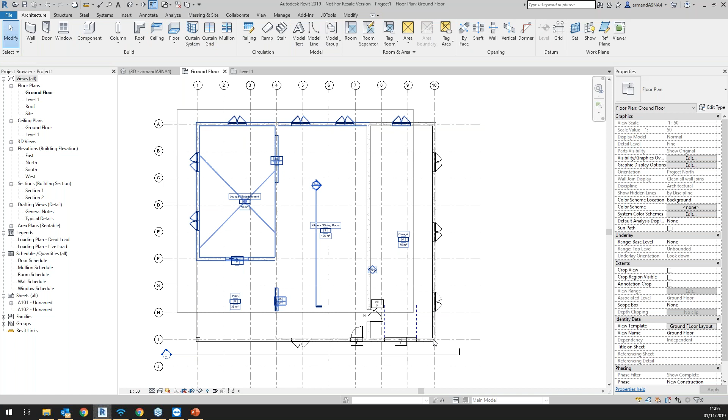I just want to go through and show some items that I feel are probably the best ones to have a look at. All right, so the first thing we're going to look at is our different selection options. We all know the very basic selection boxes that we can do. Those are the first ones. The other one is if we need to select items, we can just select them all and filter out whatever we need over here just by checking none. I know some of this is very basic, but you'll be surprised how many people aren't sure of all these different ways of selecting things.

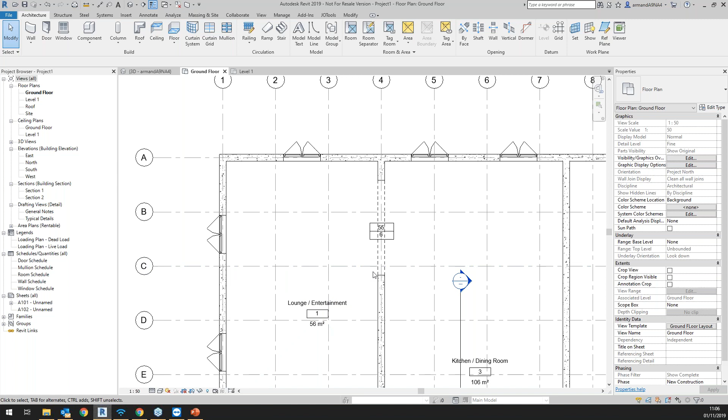Also, if we need to select something important and we are unable to recognize it, like over here, there's a room, and I can't pick it up, just use Tab to cycle through the selection options, and you'll be able to change what your selection is, even though your cursor is in the same place.

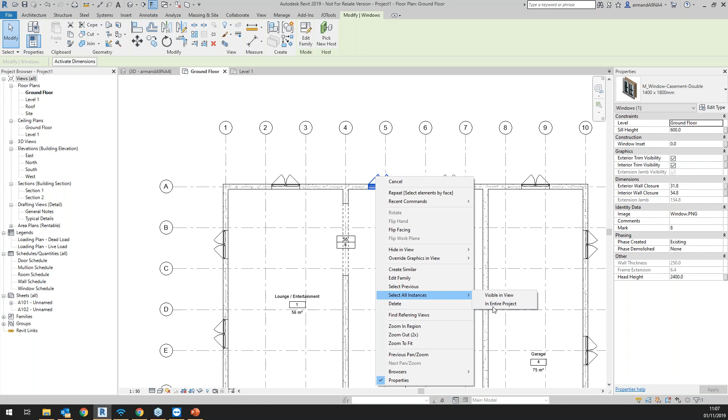All right, the next one is if you are able to find what you need to select. So for instance, I want to select this window. You can also right click and say select all instances, either in this view specifically or in the entire project. So just be very careful if you need to delete all of this type of window, for instance, on this level. We're on ground floor, so be cautious not to choose entire project, because if you do that and you press delete, it's going to delete all of them everywhere.

Okay, so that's just one aspect that I just wanted to have a look at quickly. And finding some common commands. So over here, I'm just going to show good ways of being able to identify or how to basically make Revit work for you.

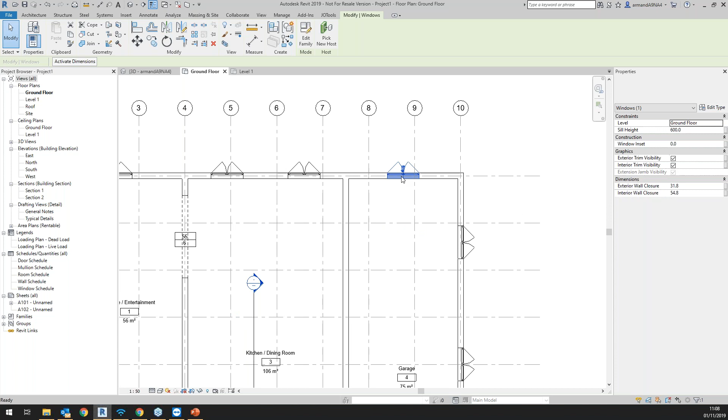So one of the most common things is guys are always asking, if it doesn't have these flip direction arrows in here, how do you basically rotate something easily, or on placements? If you just highlight or select your object and you press spacebar, it'll cycle through the different angles that it can be at. So if we have a look at a door over here, and I press spacebar, we'll see it'll cycle through all the different ways that that door can get placed. So that's just something also that we need to remember.

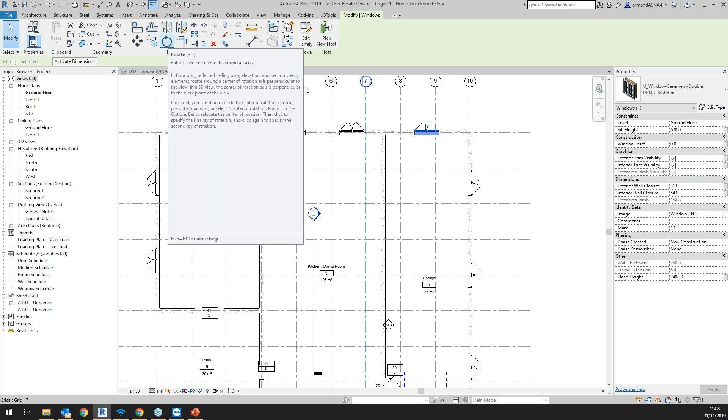It's a very quick way of doing it, as opposed to trying to actually select the item and then using the rotate command and then rotating it around. Also, if you rotate it like this, it doesn't necessarily rotate it around the center of the wall. So a lot of the times you rotate it like that and it doesn't want to work properly. So using the spacebar there is a really good way of just flipping the object around.

Okay. Another thing is, if we wanted to see the level above or the level below in our current view, we can make use of our underlays over here, and we can decide what level we want to underlay onto this view. So we're on ground floor, and if I wanted to underlay level 1, we'll see that our level 1 information will pop through over here. So that's the roof overhang that we've got there, and obviously the steel section roof outside. Okay, so that's just different things.

Remember, before presentation or anything, just to set it to none over there, very important. Also, be cautious if you are using the underlay option and you are tagging items. You have the possibility of tagging the wrong items. So just use this underlay basically just as a visual for that time being. I wouldn't work with it on 24/7.

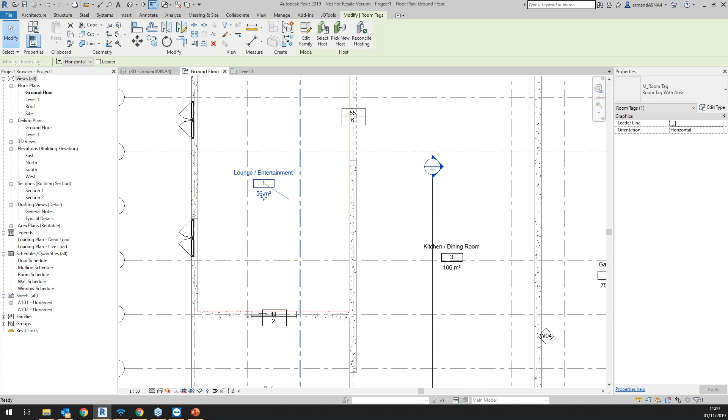Okay. Another thing that we want to have a look at is, for instance, room tags. I actually had something come up during this week specifically where guys were struggling with rooms. So I showed the guys how to create this very basic room schedule. So we can see all the rooms that we have over here, and everything's reading well. You can see all the room names are there, the room numbers are there, and all the areas are calculated.

Now, what was happening is, especially for the guys that aren't as confident on Revit or don't have as much experience or not 100% sure on what they're doing yet, and I'm just using rooms as an example, this happens with a lot more than just rooms. What will happen is guys will try and put a room in here. Sorry, I don't know what's doing the auto create now. Just go to a different view here, room.

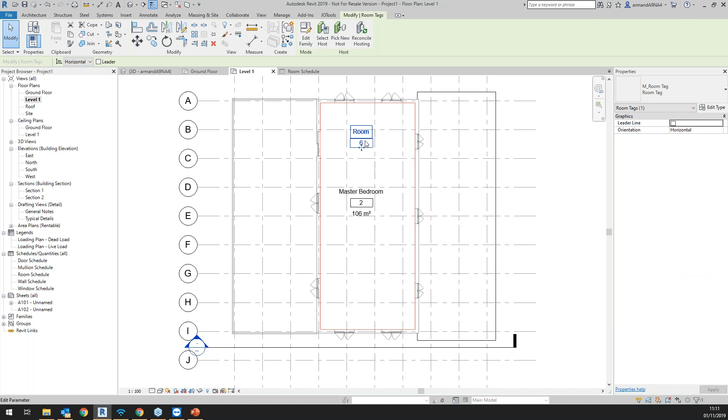So the guys will try and put an additional room in, but perhaps they've forgotten to add the tag, or they've got this automatic tag off, or they see it and they ignore it. So then they just say, okay, that's fine. And then they've got 2 room tags here, and now it looks fine to them. A quick way to figure out if you've got the correct rooms without trying to go and select them all is to have a look in your room schedule. You'll see we've created an additional room over here, and you can see the area says redundant room. Whenever that says redundant room, then you know something's gone wrong and you've more than likely just got double rooms in those areas.

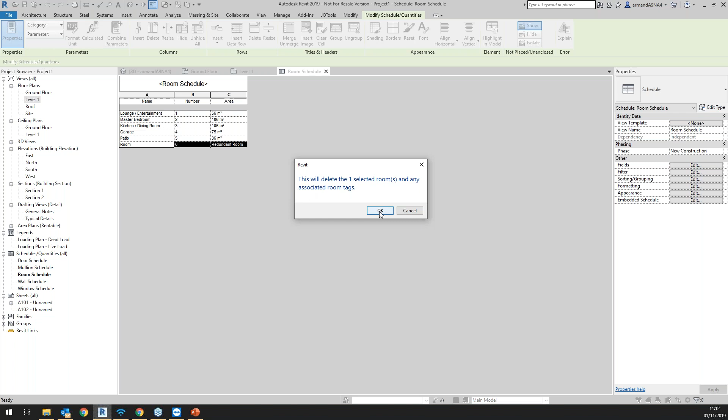And I know that especially on the bigger projects, in the architectural field specifically, you'll have hundreds of rooms in the bigger buildings, and to go back and try and find exactly where that is is another nightmare all by itself. So what you can do is just select that row, right click and delete the row, and it will delete this one selected room and any associated room tags. So then we know we've now gotten rid of any additional information that we had in there that we didn't initially need.

Okay, so that was just the one part over there that I wanted to show you. The next thing we need to touch on is the differences in linking CAD files and also Revit files. If we go to our insert tab up at the top here, a lot of the guys are importing CAD.

Obviously they haven't necessarily been taught the right way at first, but importing CAD is a big no. So this essentially falls under the know your do's and don'ts. When possible, try to avoid importing CAD as far as you can. The reason is because if you import the CAD, it actually brings all those elements from AutoCAD into Revit. So it'll create all your additional line types and text styles, and everything that's embedded into your AutoCAD drawing is now going to be brought into your Revit model.

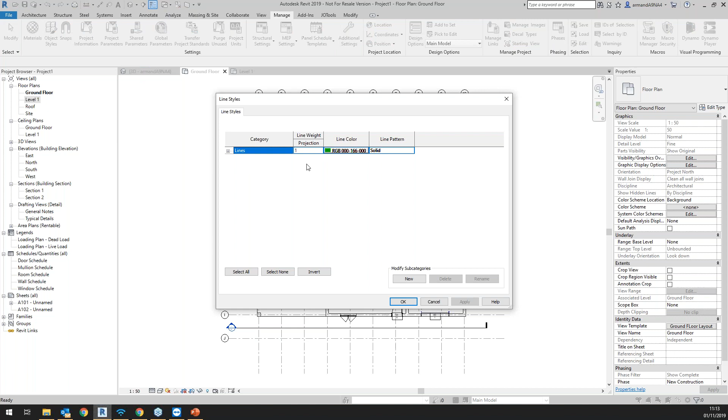And what that's doing is it's basically making actual lines in your Revit model on those specific views. So it's not even in all views, which you really struggle to find. And also it creates a whole bunch of additional line styles. So if we go to manage and we just check out our additional settings here, line styles, sorry, just give it a second. I do have a big model open over there that's slowing everything down.

If we had to bring in our AutoCAD stuff, over and above our standard lines that we have in Revit, we'll obviously get all the additional line styles and types from AutoCAD as well. Having all that additional information in there is only going to end up slowing down your model, and it's definitely not going to be beneficial. Over and above that, once you've brought it in, you have no control on how to take it out or manipulate it any further, and it's a very messy way of doing it.

So when it comes to CAD links, we just make sure that we always use the link CAD function. A good way to make sure that you don't do it incorrectly is you can just completely leave the insert tab alone and just go to manage links over there. Sorry, the pop-up just came up on the other screen. And then you can go to CAD formats up at the top here, and then you can just add in your CAD formats as you go.

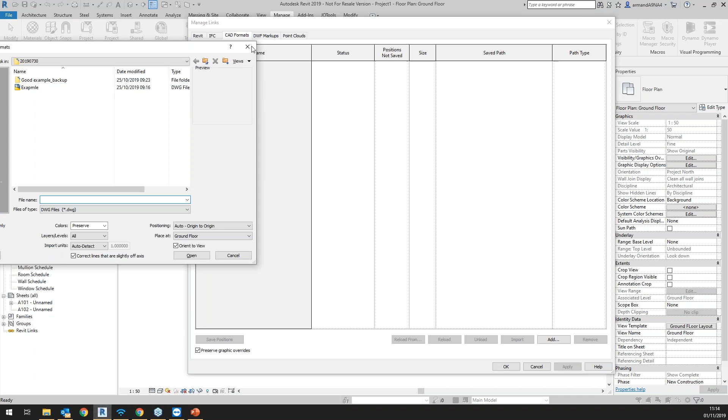So as an example, I want to bring this in, and these items over here are pretty self-explanatory. If you want to bring that CAD file into your current view only, so currently I am in ground floor, I can tick that on. This positioning is only essential if everyone's got the correct project coordinates and information in. A lot of the times the CAD files don't have that information in it, but I feel it's not really a train smash at all.

Colors, you can decide if you want to change everything to black and white, invert them or preserve them. I usually just leave it on preserve. I want to bring in all layers. This is mainly for if the guys have locked layers or frozen layers or switched layers off in AutoCAD. So it just allows you to bring in everything.

This import units, a lot of the times, especially if you're drawing from a surveyor, their units may not be correct. Most of us work with millimeters, but surveyors generally work in meters. So if we know exactly what units are being used inside the CAD file, I suggest we select it. But if we don't, we can say auto detect. If you bring it in and see immediately that the scale is completely out, you know to go check it in CAD and then use the correct units when bringing it in here.

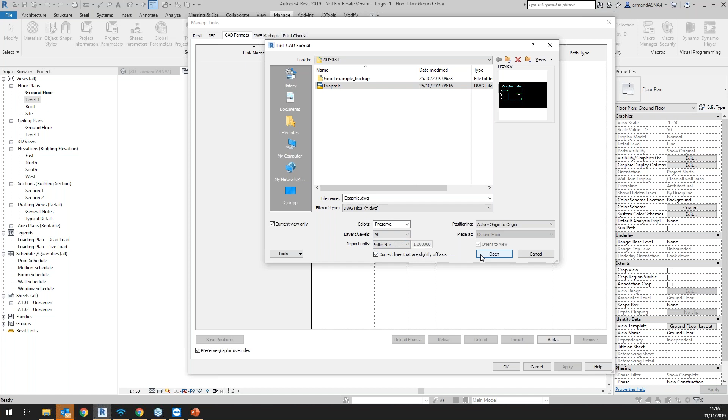All right, so now that I've selected all my options, I can just say open and it will start loading this link in for us. Now you can see the link name, the status is loaded, the position is not saved, and then this is the path of where it is. So I'm just going to say okay, and there it is. It's not the same building, I'm aware of that. It was just an example. We can see also that it hasn't necessarily come up where we needed it.

Obviously, with CAD links, you can just unpin it, and then you can either drag it and move it, or you could even use the align tool to align the different parts of the building. So that's the inside of that wall and the inside of that wall. Let's just bring this to the front to make sure that we know what we're seeing over here, because if I move it up now, I'm not going to be able to see it. It's going to be underneath in the background of my drawing.

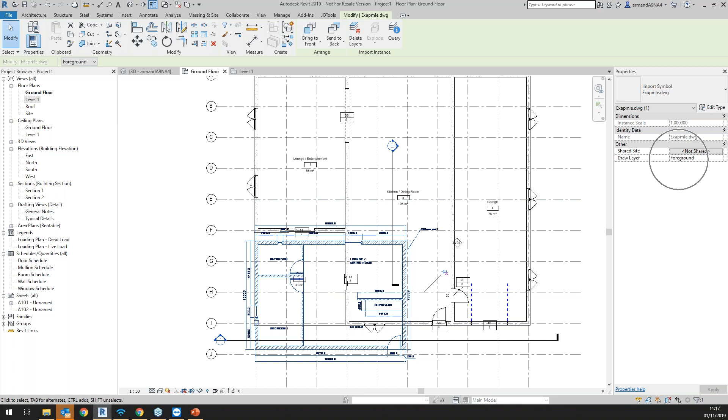So I just come over here and change this to foreground. You can also do it on the right hand side on your properties pane. You can change it to foreground. So let's just carry on aligning it. There and whoopsie. There and there.

Now, once you've got it in place, I always suggest pinning it. I've learned this the hard way. You don't pin something, you move it, or you delete it, or someone else comes along, and then it's a bit of a mess because you start updating things, thinking someone's updated their drawings. Meanwhile, you've actually just accidentally moved it, or someone else has accidentally moved it, and you end up giving yourself more work.

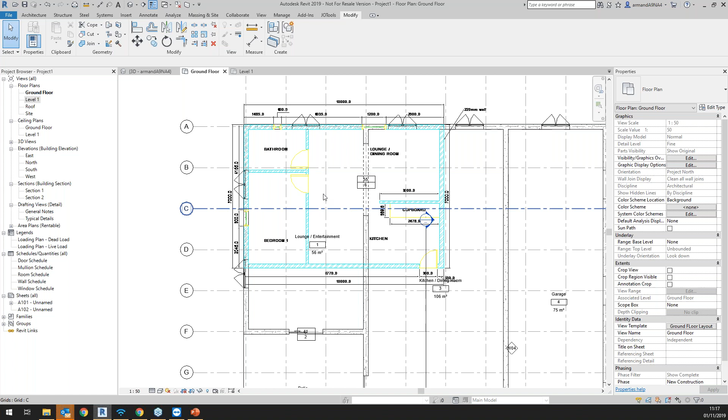Within this link over here, if we select this CAD link, we can still use the query tool, which allows us to identify different elements of this CAD link that we have in. So if I select this line, it'll tell us the type, the layer that it's on. It'll give us a whole bunch of line information over there.

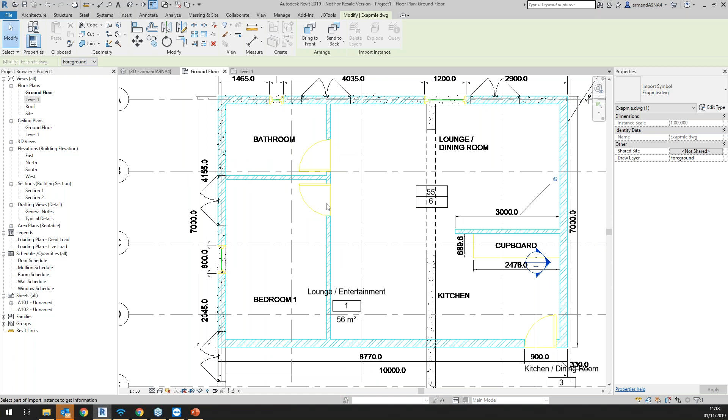Okay, another thing we can do is go to our visibility graphics and go through to the imported categories. I've got a view template on here, so I can't edit it there. So I'll just go into my view template, and inside my view template I can go to visibility graphics overrides for my imported categories.

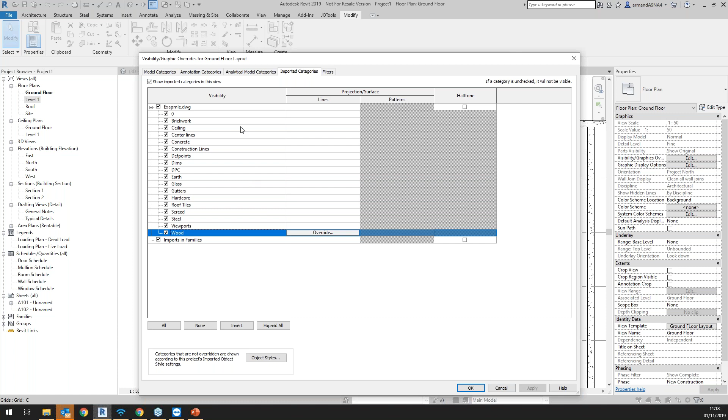And bear in mind with AutoCAD, you cannot just override the lines over here. You should expand it, select them all if you want them all to be the same color, and then we can just override it there. You can also override each line specifically. I'm just using this as a very quick example. And there we can see it's been overridden. We can also switch off certain lines and layers in that override settings as well.

Okay, last thing with AutoCAD links is if you haven't imported it, you can go back to your manage links, CAD formats, and you can either unload it if you just don't want it to be part of your project for now but you still want to save the link, or you can remove it completely.

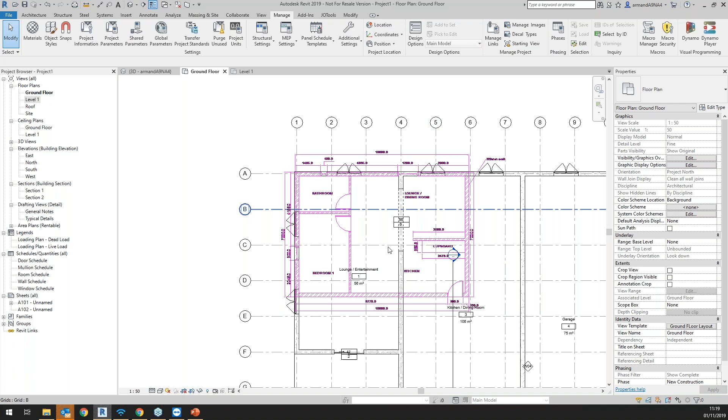If you've updated your CAD drawing, say for instance we removed this wall in our CAD file and we just wanted to update here, we don't have to redo the whole process. We can just click on that and say reload, or alternatively, if the path has changed or if we changed the name slightly, we can just say reload from, and we don't have to go through the whole process of bringing it in and aligning it again.

Okay. The next one I want to have a look at is Revit links. So I'm just going to try and link in a very simple Revit link now. Let's see what I can have. I'm just going to link in this project one. It's not going to be the same building; it's going to be a separate building. We're just using this for examples. So we can see now it's already loaded in. That was nice and quick. This is our link. Status is loaded.

Reference type is overlay. The only time I would change this reference type to attachment is if I'm packaging up my model and sending it off to someone else the old-fashioned way and not using the BIM platform. Then I would change that link to attachment, and it kind of binds it together so that it doesn't necessarily need to know the save path.

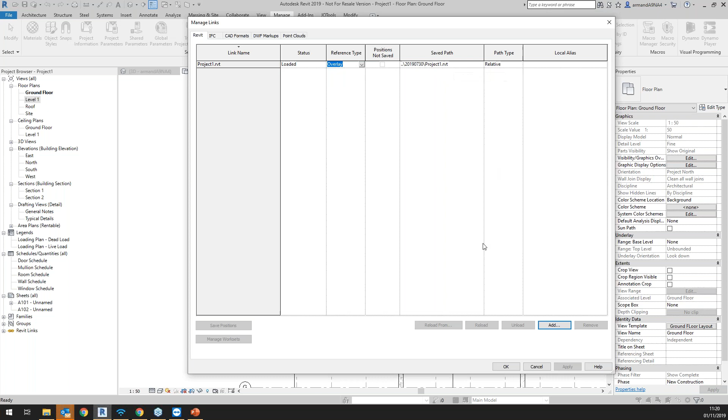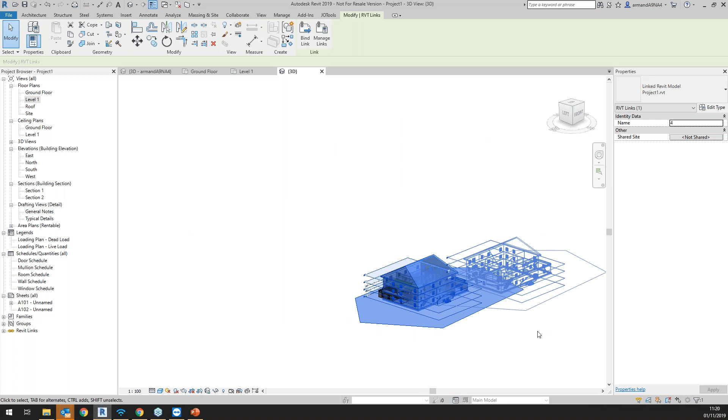Okay, so there we can see it's totally different. These are 5-meter grid spacings. It's brought in our Revit model, and I'm just going to go to a 3D view and show some manipulations over here. Please bear in mind, the only way you can manipulate a Revit model is if you've got the full Revit package and not Revit LT.

If you have the Revit LT, you are severely hindered in your abilities of what we're going to do now. So please remember, I'm going to manipulate the visual part of it quite a bit, but anything you manipulate visually in your visibility graphics, even if it's for the links, is always view specific. So whatever I change here is not necessarily going to change in a different view.

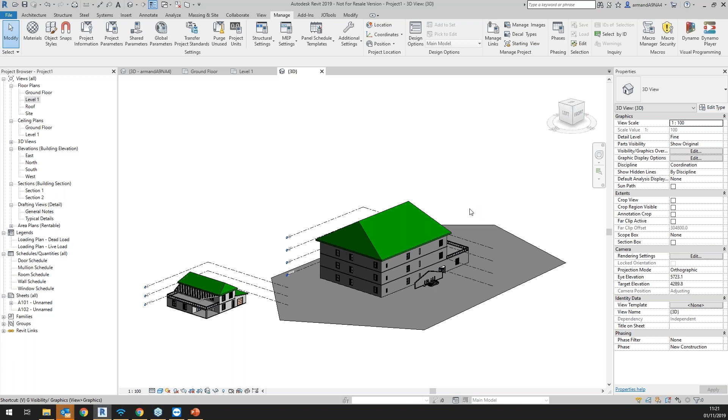All right, so I'm just going to go to visibility graphics and go to Revit links up at the top. And this is my link that we're having a look at. It's this one over here, okay? I can go now and start changing the display settings. So over and above being able to halftone and underlay it, I can also go and change the display settings of my link itself.

First thing you've got to do is always just change it to custom, and a lot of the times you may not necessarily have this on coordination, but let's just make sure that the discipline is always on coordination. That way, if your view settings don't allow for certain items, or if you've got any different parameters set in place, coordination will always allow you to see, regardless of which discipline that other person's working in. So if you're working in structures, usually you only want to see the structural stuff, so you'll change your discipline to structures, and perhaps you've got a filter on and you won't see the architect stuff. If you just change it to coordination, it should work pretty well.

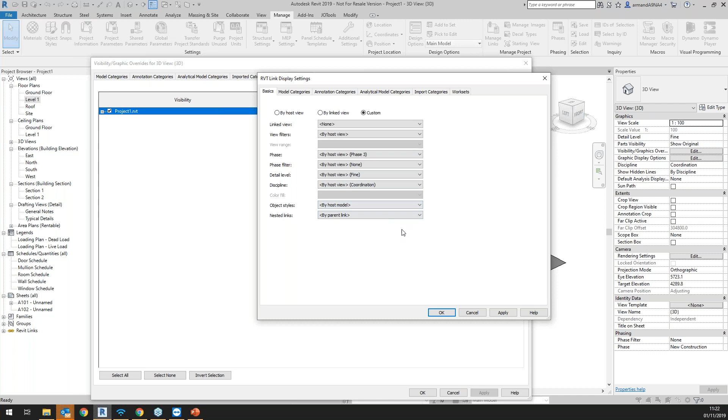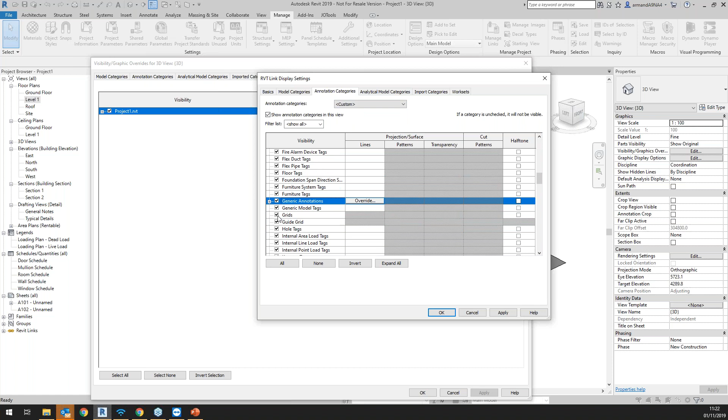Okay, the next thing we can do is go to annotation categories. I know I've skipped model, but we'll go back there. Under annotation categories up at the top here, we need to change that to custom as well. A lot of the times in the plan views or in elevations, guys are saying we're seeing the level markers or the grid lines from the linked project, and we don't want to see that. Then you can just come to the annotation categories and change this to custom. And then over here, you can look for, as an example, grids, and you can just switch grids off, and you can switch levels off, and then you won't see them in that view that you've changed.

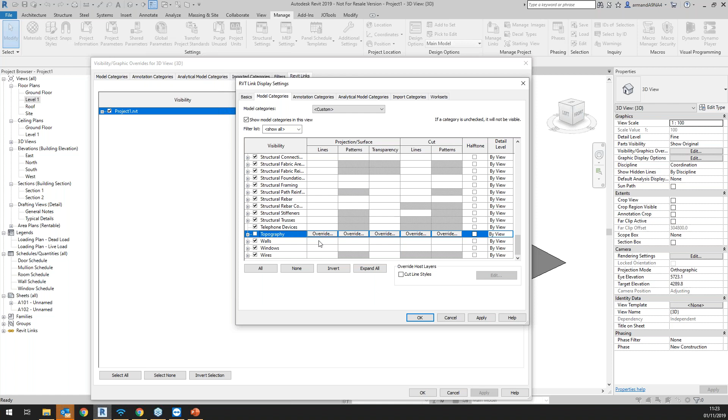Going back to model categories, again, we can change this to custom, and we can see over here, there's a bit of a site or topography over there. Say for instance, we don't want to see topography in our view, we can just switch that off. And with the walls, perhaps we want our walls to be slightly transparent so we can see through and into the building. This is a percentage. I'm pretty sure you guys all know what that is, so I'm not going to get too deep into that. We can change basically the whole colors and everything of it as well. I'm just going to apply these changes for now, and let's see what happens to our model.

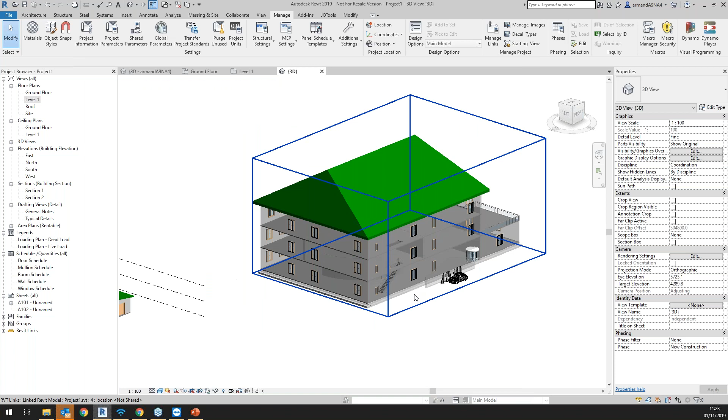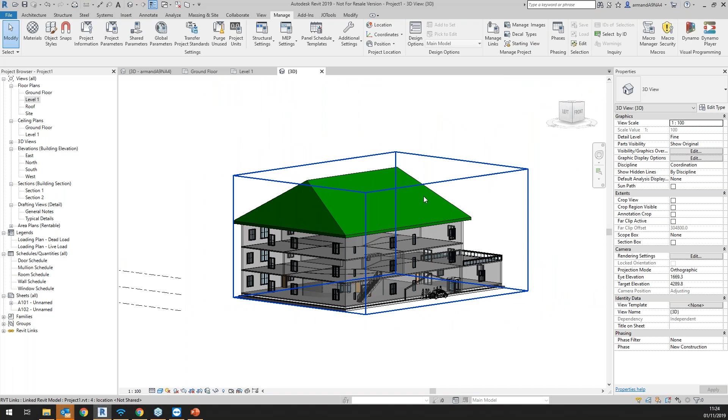So we can see initially that the topography has now gone from that link. A lot of the times you'll receive a model and there'll be a surface in there, and sometimes you're trying to work with it and the surface is getting in the way and you can't see properly. You can just go and switch that off, or you can essentially just make things invisible as well. So you pretty much have full manipulation over this linked Revit model from a visual point of view. Obviously with the Revit LT, you don't have that ability, but with the full Revit, you've got full control over what you see here.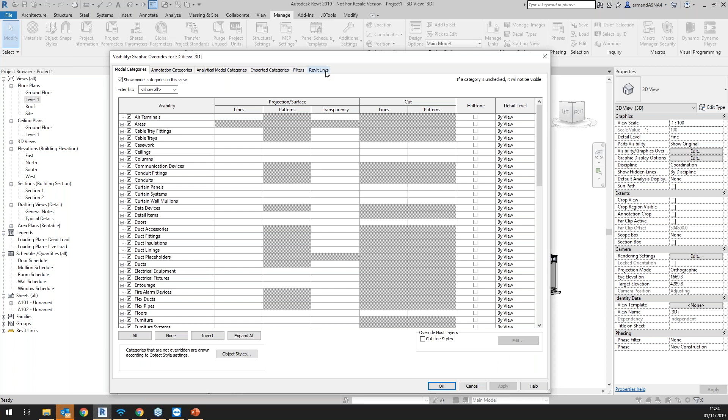So for instance, if I don't want to see the windows now, we just go back to visibility graphics. The shortcut for that is either VV or VG. I use VG, I think it's just a habit. So if you pop in VV or VG, it pops up with this menu over here. And then we can just go to the display settings again, model categories, and start switching off the windows. So just untick windows over there, apply and OK, and nothing has happened. Evidently, did I not switch it off? Sorry.

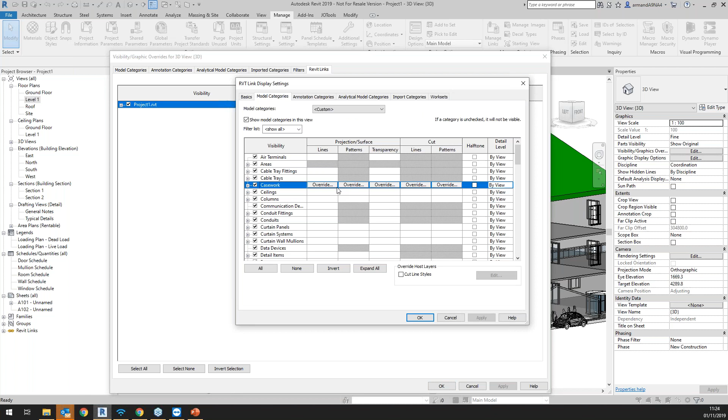Let's just go back there and have a look at windows again. I did switch it off, so why is it not switching them off? Right, okay, so this is now falling under generic models. So let's go back there and see over here. We'll go back to model categories and just switch off generic models. Okay, apply and okay, and there we go.

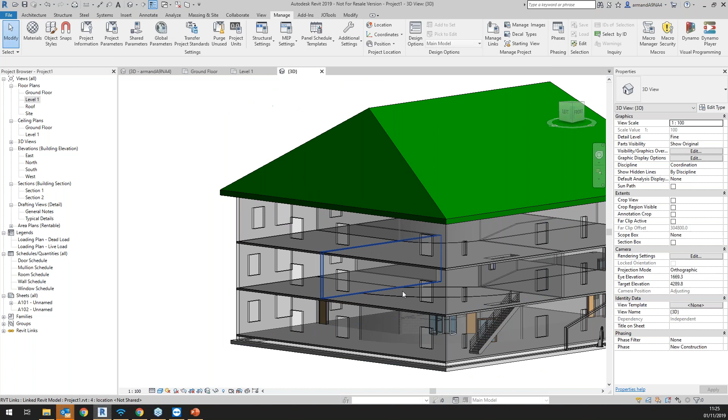So now we've switched off the windows. Sorry about that, I obviously drew them very badly the previous time. All right, so that's pretty much that for how to use the models point of view. I just needed to go over that. I think the most important part of looking at linking models was for guys to understand to try and stay away from importing the CAD models, because it does actually cause problems later on in the project lifecycle.

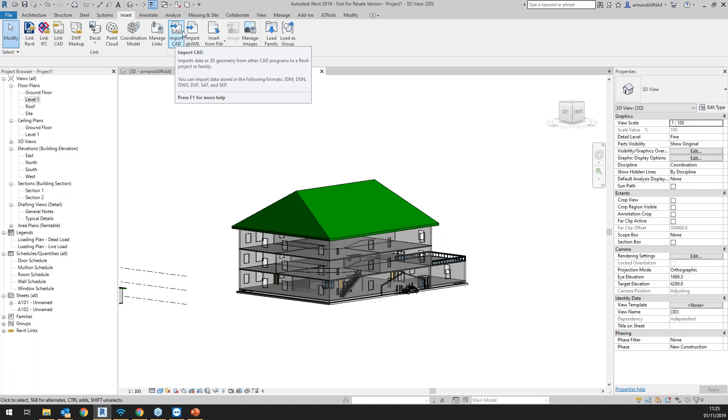Also, don't forget, if you just select your model like that, it just selects the whole item. Obviously, if you press tab and you cycle through your selection options, you are able to select individual items from there as well and see all the relevant information in the properties pane of the elements that you've selected. Okay. And basically, the last thing I want to have a quick look at is project warnings.

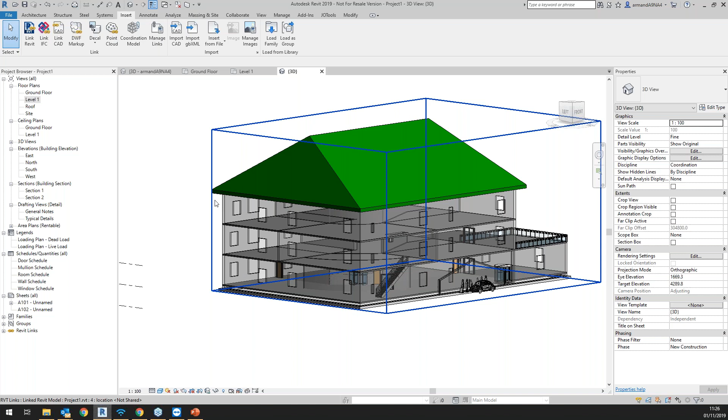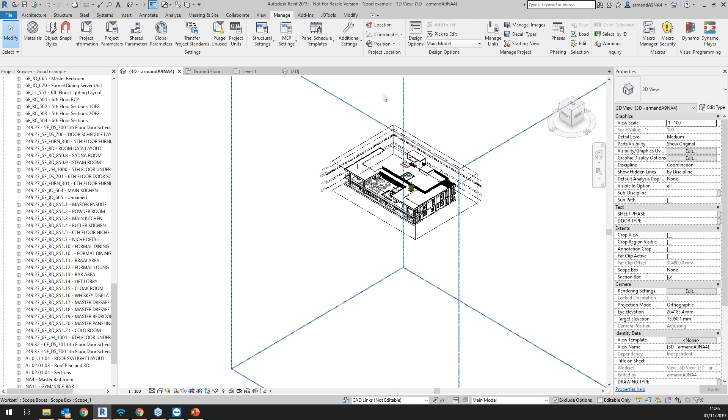So for this, I'm going to go to an example of some project warnings, purely because that other model doesn't have any warnings in it currently, because it's a very basic thing that was not supposed to have any warnings. So we're having a look at a little more complex model over here, and what happened over here, different disciplines all worked on the exact same model and they didn't link things in together, so there are copious amounts of warnings in here. As you can see, it's extremely slow, but let's just have a look at warnings.

If I click on the warnings tab, it brings up our little palette here of the warnings. So it is very slow. And then it says over here, landing, let's just look at this one. Landing depth is less than run width. So it's obviously a stairs issue. Okay, let's look at this rooms one. It's probably a bit easier.

So we just expand that, and then we've got warning 409, and then we can expand that one as well. All right, and then you can select your work set over here. Work set 1, room, services room number 175, and it tells you your ID over there. So you can either go and show it through here, but I prefer to go and use this number and go and look for it by saying select by ID over here. So what's that? 13359. Watch me forget it this time.

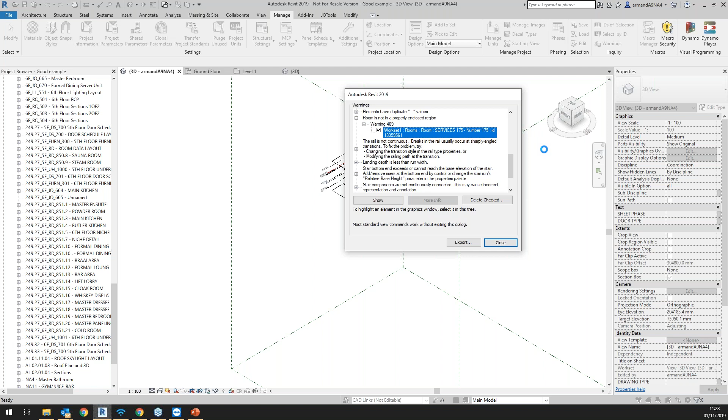Sorry, it's just busy loading. All right, I'm just going to close this. Sorry, it is very slow. I do understand that. I probably do need a faster computer to run a project like this. So if I remember that, it was 13359561 was that element. So now I'm going to go show. Okay, let's just select it. Sorry guys, it is taking some time.

Basically what this allows you to do is now to start working through your warnings, because the less warnings you have, also the faster your model becomes, because there's less items for your model to now have to go and read every time you perform a command. Pretty much it's going to go through those list of warnings to make sure that it's not clashing with any of those or adding to it.

So what this process is that I'm trying to get to is basically you see your warnings, you get the idea of where the warnings are or around that area, and then you go and find that specific thing and you correct it. So I'm not necessarily sure if we're going to be able to correct this one specifically now, but this is generally what you are able to use to go and identify those issues. I think I've made a very big mistake trying to open up this specific warning over here.